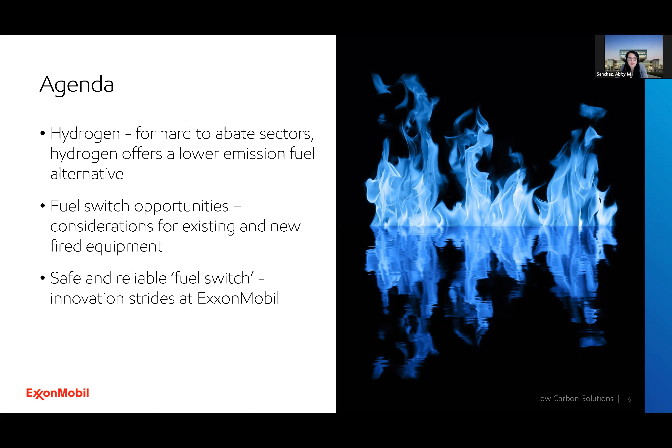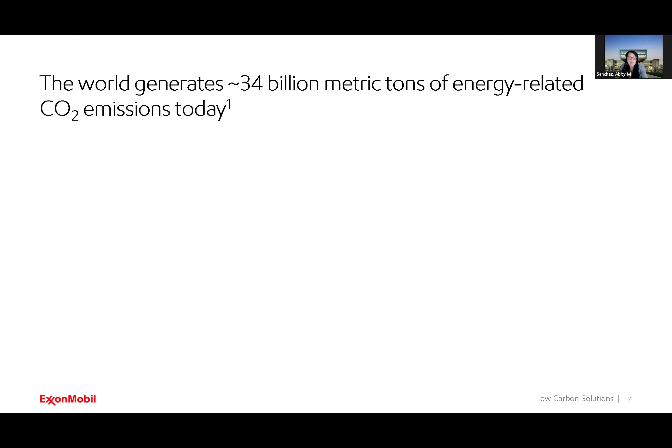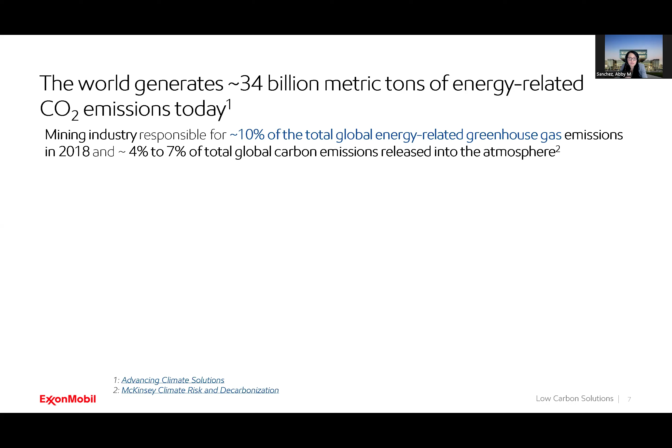So let's go to the big picture. Every year, our world generates about 34 billion tons of energy-related CO2 emissions. And the mining industry plays a significant role, being responsible for about 10%. Of that, around 7% is released to the atmosphere. So just to give you a perspective, this is roughly equivalent to the annual carbon emission from around 74 million typical gas passenger vehicles.

In the chart on the left, we see emissions from different mining sectors, such as gold, iron, copper, nickel. This is a chart from 2019. I bet you are very familiar with this. The blue bars represent Scope 1 and Scope 2 emissions. Scope 1 refers to direct emission from sources directly controlled by the mining operations, like combustion fuel for machinery. Scope 2, on the other hand, includes indirect emission from purchased electricity or heat for the process. And the rest of the emissions, the red bars, are associated to transportation and other downstream processing like smelting and refining.

But this is where things get interesting. Each mining industry has its own carbon footprint challenge, highlighting the need for tailored solutions. That will require some key considerations that you can see on the right and initial steps like energy efficiency equipment, optimization across all the stages of the mining operations, explore integration of hybrid power, combining renewable sources with traditional power generation, transition to alternative vehicles, and explore opportunities to adapt the mining process, which sometimes will require retrofits on equipment to utilize clean fuels like hydrogen. The key message is by understanding the scope and distribution of those emissions, you can start to pave the way for the most suitable path.

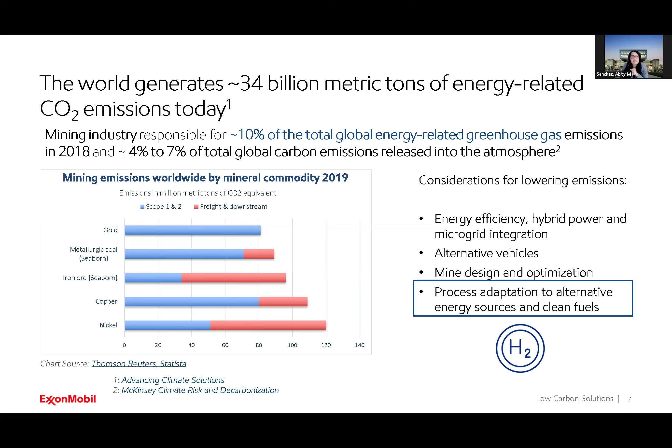Now, let's start to talk more about the role of hydrogen in emission mitigation. At ExxonMobil, we're color agnostic when it comes to low carbon hydrogen. All types of low carbon hydrogen are needed to help achieve a net zero future. Depending on where your facility is located, one form of hydrogen may have an advantage over the other. We offer different solutions based on customer needs, and this is validated through a carbon emission reduction assessment that our technology team does.

I bet you have seen different colors, and sometimes this can be confusing, but it is pretty simple, actually. The color classifications that you can see in the top and the bottom are related to the energy sources and production methods. Blue hydrogen in the top. Here, natural gas is used, and the hydrogen is obtained through steam methane reformer processing. In the outcome, you will have hydrogen and CO2. The CO2 will later be captured and stored.

The second option, turquoise, is also obtained through natural gas as a source. We do thermal decomposition of the natural gas or the methane. Here the products are hydrogen and solid carbon. As a result, the CO2 release is prevented and it does not require carbon capture and storage. In the bottom, you can see green and pink via water electrolysis, which can be powered by renewables in the case of green and nuclear in the case of pink. The right production method or hydrogen color will depend on different considerations.

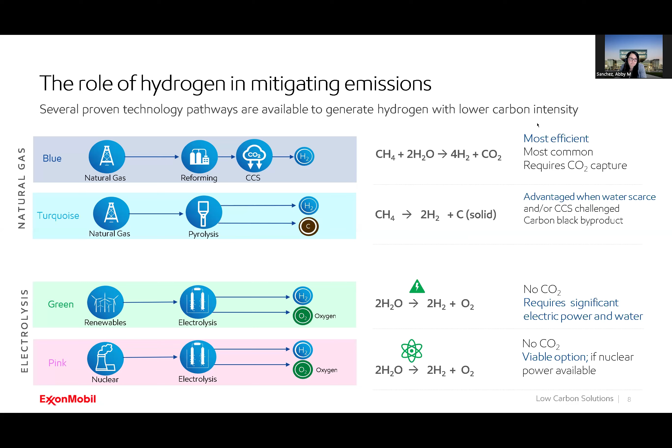You will need a thorough assessment of the process you intend to reduce emissions to determine which option could be the right fit for your process. In the next slide, I will show you more about what we are doing, which is ExxonMobil's position with hydrogen.

And just to give you some background, hydrogen is not a new business for ExxonMobil, right? We have done this for decades. So today, ExxonMobil is one of the largest hydrogen players in the world. We produce and consume more than 1 million tons per year in our refining and chemical operations. We're taking our learnings on the use of hydrogen in industrial facilities for our own scope. We're working with the customer on best practices.

In that way, we're looking to ensure that their demand can be met reliably with our low carbon hydrogen supply. We're expecting to make a final investment decision by 2024, this year. And producing low carbon blue hydrogen in the Baytown plant could reduce the site CO2 emissions by up to 30%. Blue hydrogen at Baytown will support our ambitions of achieving net zero scope 1 and 2 across the operated assets by 2050.

We plan to produce up to 1 billion cubic feet per day of hydrogen made from natural gas and expect to capture 98% of the associated CO2 to be stored underground safely. This project could be the lowest carbon hydrogen plant in the world at the time that we're planning to start up in 2027, 2028. So please stay tuned with this project.

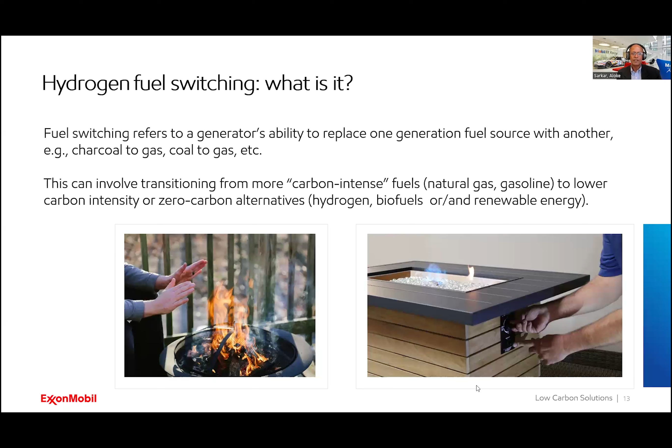On the next slide, it talks about why consider fuel switching. It's a concept, it's an idea, it's an aim that you are attending this webinar to learn more about, but we know the objective.

The aim here is to basically reduce the carbon dioxide footprint of the fuel. So that's why a change from coal to natural gas gives you a reduction in carbon dioxide. Go from natural gas to another low carbon intensity fuel, and then you go all the way to hydrogen. Now you're not making any carbon dioxide. So that's the consideration.

In the current world we are trying to lower emissions, and the ambition for net zero targets is accelerating this transition a lot more. There are low carbon initiatives, and organizations are trying to go there. There are conversion incentives like the Inflation Reduction Act. The state governments and local governments are giving benefits. It's there globally, in Europe, Canada, and Asia. So it is not just reducing the fuel, there is also an economic advantage to doing the fuel switch.

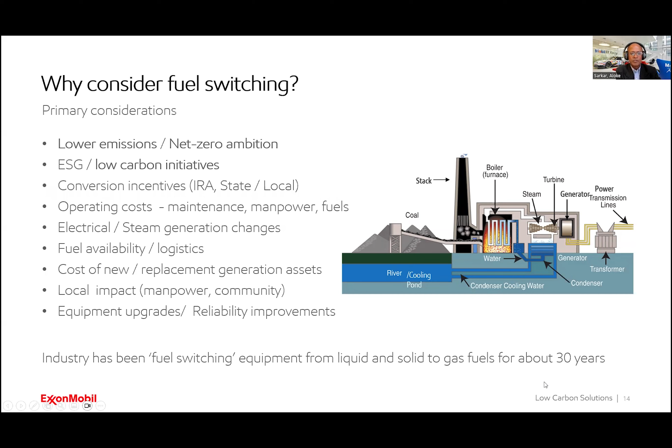As I mentioned, the concept is nothing new. It's just going one step farther, particularly when you're going to 100% hydrogen or 95% hydrogen, very high hydrogen. The next slide talks about the areas where you can do a fuel switch, and actually it can be anywhere. When we say fired equipment, it's equipment where you are burning fuel, or in other words, where you have a flame inside and that heat delivery system. You are just changing the heat source from one source to another, and the objective is to go to a low carbon source, right?

Industry type, I would not go through all of those. It's quite common sense. You've got electric plants, industrial sites, whether it's a petrochemical plant or a refinery, the mining industry, steel, cement, it can be anything. Universities, colleges, healthcare, hospitals used to have coal-fired boilers decades back, and they have now all transitioned to natural gas. So now we're talking about maybe going to 100% hydrogen. Are there any other alternates that can make it low carbon intensity?

Now, applications. Even though we talk about industries, where does the fuel go? The applications are fired heaters and reaction furnaces, the heaters where you heat a process fluid, like in the refinery or petrochemical industries. And then you have boilers everywhere. You need steam for heating or for power. You have cogeneration systems where you make steam and power. And then incinerators, thermal oxidizers, and calciners, more common in the mining industry. So this is where the fuel is being burned.

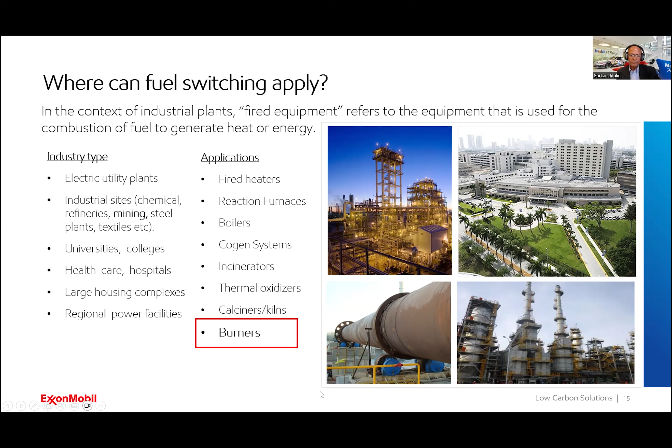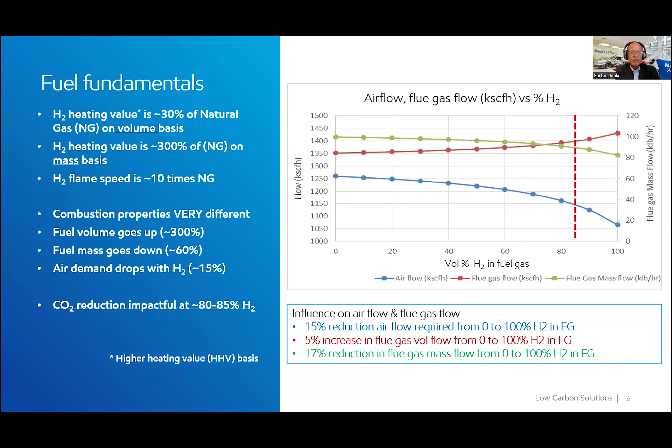One fun fact here that you will see on the chart with the dashed vertical red line you see around 85 or 90% hydrogen, is that when you are going from 0% hydrogen to about, let's say, 90% hydrogen, you get carbon dioxide reduction of about 50%. So it's not 1-for-1, meaning if you want the bang for your buck, you are aiming for higher hydrogen. That will give you the most impact for your change. Moving on.

So when you do the fuel switch, what are the considerations to be taken for the fired equipment? And again, this is fired equipment, meaning it can be a boiler, a heater, a thermal oxidizer or a rotary kiln or whatever system that you have. And obviously, it depends a lot on what the existing equipment looks like, right? If it's a very old coal-fired boiler, then obviously the changes are expected to be much more than if it's a natural gas-fired boiler designed 3 years back. What type of burner does it have? What type of air delivery system does it have? So all those factors are important.

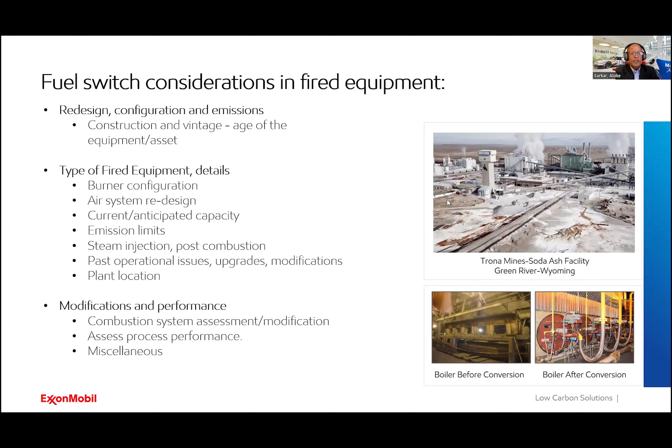However, on a retrofit application, as I mentioned, it depends on the vintage of the design, right? So that's why it depends on a case-by-case basis. However, there are no technology barriers. It's all about how much money you have to invest, and that depends on a case-by-case basis. What are the changes that you have to do? But it can be done.

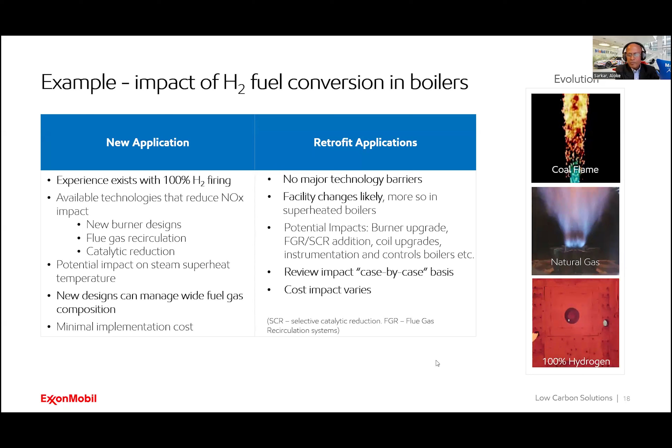I want to draw your attention to the pictures you see on the right side. Coal flame is bright. It radiates a lot. Natural gas, bluish flame, like what you see on the stove, you can still have radiation from the flame. Hydrogen is very transparent. I mean, it does radiate, but the emissivity, a physical characteristic of the flame, changes significantly from coal to natural gas to hydrogen. And those are more the inside-the-hood things that you have to consider when you're looking through the transition. For interest of time, I will move on to the next slide.

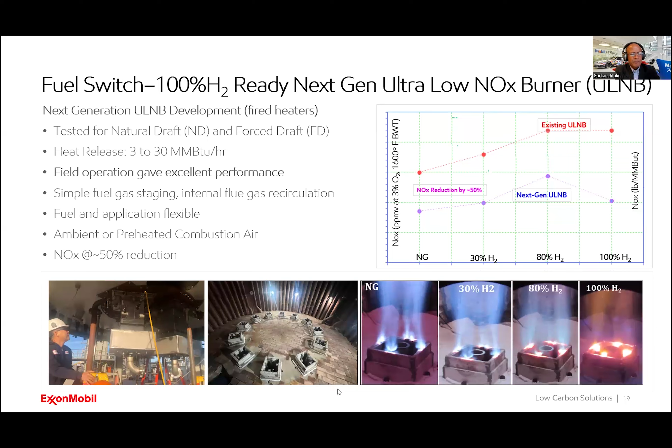You have to think through not just the fired equipment, it's also how you deliver the fuel and how you manage the transition when you go from natural gas to hydrogen, or hydrogen to natural gas if that is the backup fuel, right? And it can be done. In fact, within ExxonMobil, we have in our refineries fired heaters or fired equipment operating today and the last few years with as high as 70% hydrogen. So we are just upping the challenge by a notch. It's not unknown. We are going to be a little better than what we have done before.

One last item, I mean, there are lots of considerations. One last item I want to leave you thinking about is the robust safety, protection, and control system for fuel transitions. That's the safety aspect you have to consider thoroughly when you are considering the fuel switch. What that means is when you are firing on hydrogen, and let's say there's an interruption of hydrogen supply, natural gas kicks in. Hydrogen being low molecular weight, large volume, natural gas, when it kicks in, can actually put too much fuel into the heater. How do you manage and mitigate that? So that transition is extremely crucial for safety of your equipment.